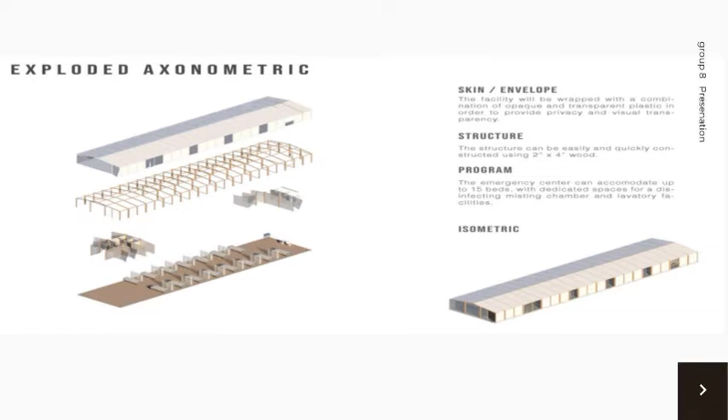Since our resources are limited and logistics at that time were difficult under enhanced community quarantine, the facility needed was one that did not require a lot of manpower and construction equipment. The EQFs are meant to use materials that are readily available and understood by anyone, such that any worker can work with it, not just throughout the city, but nationwide.

As you can see in the picture of the floor plan and the structure of this design, each facility measures 6 by 26 meters and will have 15 beds and 2 toilets. Patients and healthcare workers have different entrances, with doctors having their own external testing box to check patients without having to go inside the facility.

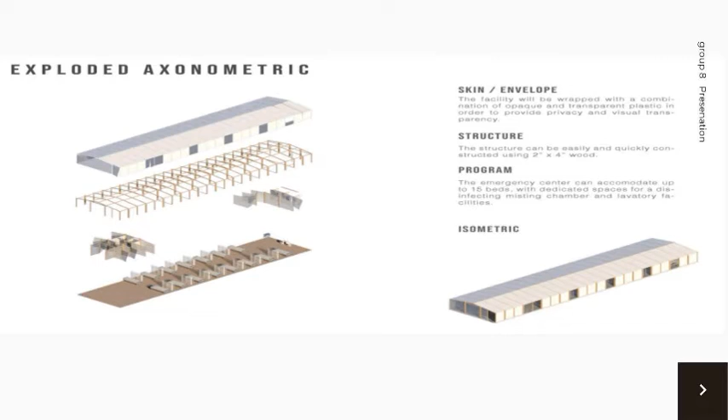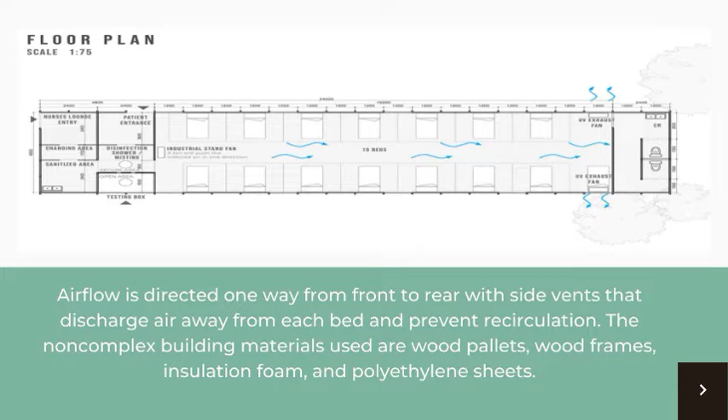Based on investigation by the World Health Organization, transmission of the virus happens due to sneezing and coughing, so we are asked to wear masks. Since the spread is airborne, the architect must consider how the air circulation will work inside the facility. Airflow is directed one way from front to rear, with side vents that discharge air away from each bed and prevent recirculation.

The non-complex building materials used are wood pallets, wood frames, insulation foam, and polyethylene sheets.

In addition, the designs have been posted online and made open source so that anyone can use them. The company hopes that more organizations will adopt the designs and use them as they see fit to build more facilities more quickly. As of April 15, 2020, the WTA Architecture plus Design Studio, along with many collaborators, completed 17 EQFs to reach their goal production of 62 units, providing approximately 1,000 beds.

Along with that, Filipino architects in the DOH, RITM, and LCP are already applying architectural, medical, and engineering solutions.

The second proposed design is made by Architect Rico and Architect Florendo. Architectural solutions were formulated for the designs such as cargo containers and repurposed government-owned structures like unused buildings, gymnasiums, sports centers, convention centers, covered courts, and even classrooms in public schools are to be used. Each has its own advantages and disadvantages, depending on the different parameters and requirements.

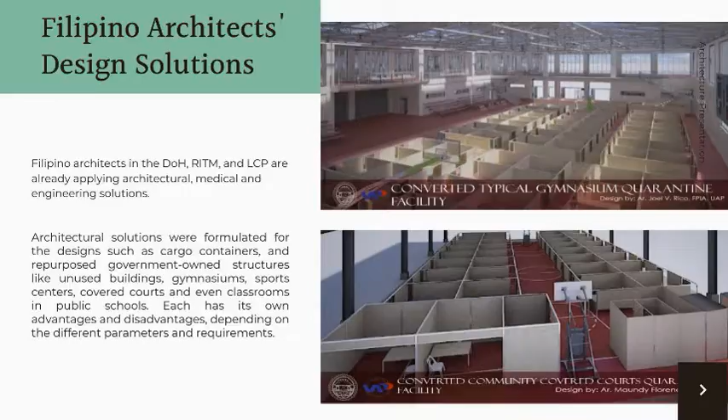The second one is, according to the design of architect Florendo, he used the concept of modular coordination system considering commercial dimensions of major materials. Design volume management is applied in order to minimize costs and wastage. Panels are easily sourced materials with lightweight metal frames. Components are collapsible and easy to transport. Lastly, panels are to be applied with self-cleaning and germ-retardant paint.

Some of these facilities may not fully address the requirements but could be considered as a temporary solution at the time. These were conceptualized to augment the needs for such facilities as the fastest and easiest solutions, as these quarantine facilities may help existing hospitals protect its more vulnerable patients and health personnel against the risk of contracting the disease. The pandemic has called us to refocus our interests from being a solitary designer to multi-professional and multi-scale design collaborators in order to address a worldwide health problem in pursuit of medical and design solutions.

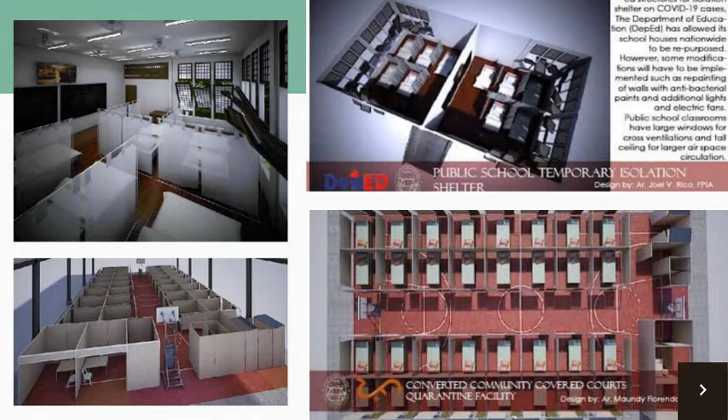Next is how the architect prepared the individual from COVID-19.

By conducting research about COVID and its causes, architects can be prepared and help individuals, as spaces can be intentionally designed to help prevent, contain, and treat infectious disease including COVID-19.

Some have put up tents to help the homeless during the COVID-19 crisis. Heated tents with bathrooms and showers have space for 40 beds for infected homeless people to get the care they need away from the shelter community.

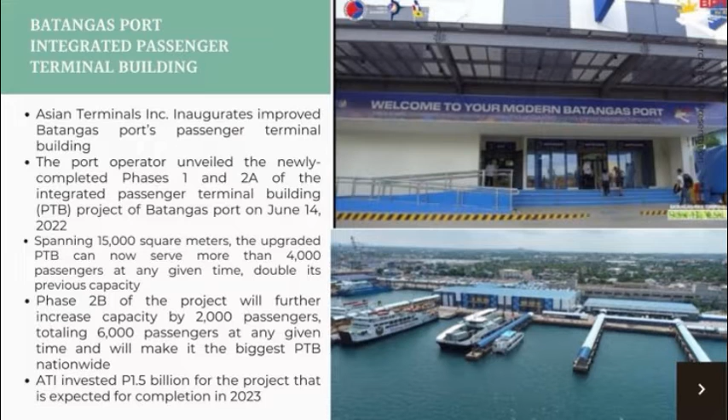If passengers need assistance, there's an information help desk with customer service staff ready to assist 24/7. Next is the facilities of the passenger terminal building. It is fully air-conditioned and has PWD-friendly facilities to offer a more convenient and comfortable travel experience for passengers.

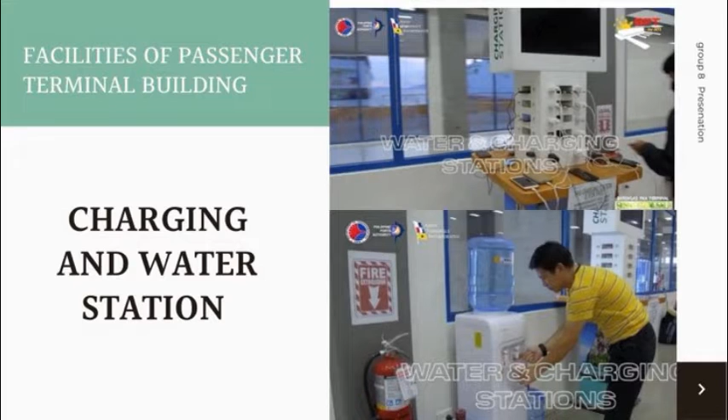First is the waiting area lounges or VIP lounge. Next is the charging station and the water station. Next is the nursing room for breastfeeding moms and a multi-faith prayer room available for all religions. Next, the ticketing system is like a modern airport amenity. Lastly, the pasalubong center.

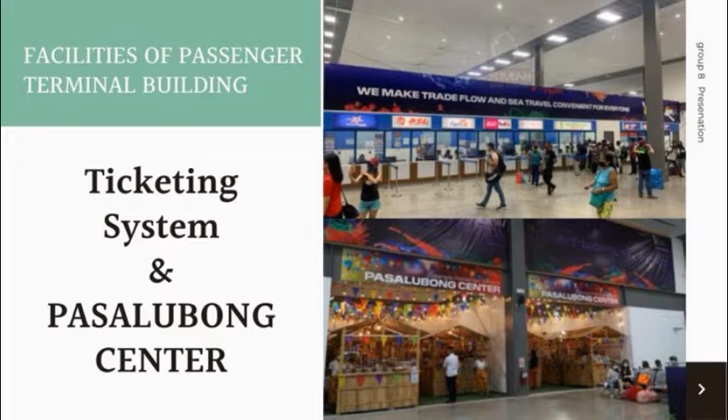In the passenger terminal building, there is a protocol and guidelines. First, terminal personnel shall wear masks and gloves at all times. Second, commuters shall undergo body temperature checking prior to entering the terminal. Next, commuters shall wear masks and observe social distancing. And lastly, ticket sellers shall be separated in a booth to limit physical interaction with commuters.

The upgraded port is now capable of delivering a more efficient, seamless, safer, and convenient maritime travel to our local and foreign visitors.

The PTB or Passenger Terminal Building further provides livelihood to Batangueños as more job opportunities will be opened and expected to usher economic and tourism growth in Calabarzon.

The next structure is SM City Roxas, a super mall of SM Prime Holdings Incorporated, which officially opened its doors on April 8, 2022, bringing many firsts in the city in shopping, leisure, and entertainment amid the relaxed COVID-19 restrictions. It is located at Arnaldo Boulevard in Barangay Baybay, Roxas City, Capiz.

SM City Roxas offers 2 levels of shopping, dining, and entertainment experience with almost 1,000 parking slots and a transport hub. It spans almost 41 thousand square meters of gross floor area, or GFA. SM City Roxas also offers an atrium that features a large open-air, skylighted space design, incorporating distinctive modern texture and fascinating colors.

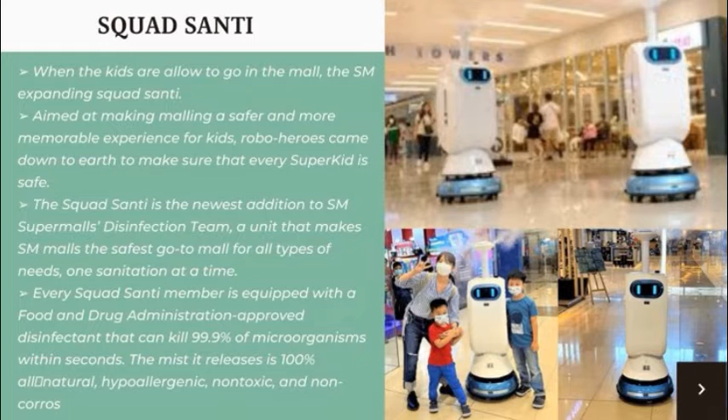It's armed with HD cameras for face recognition, a touchscreen, and a microphone to greet the kids, adding more fun to their malling experience. Lastly, every Squad Santi member is equipped with a Food and Drug Administration approved disinfectant that can kill 99.9% of microorganisms within seconds. The mist it releases is 100% all natural, hypoallergenic, non-toxic, and non-corrosive.

The next structures built during COVID-19 are Huoshenshan and Leishenshan Hospitals, located in Wuhan, China. As we all know, Wuhan is the epicenter of COVID-19, and these hospitals were built in just 12 days. Here's a video about Huoshenshan and Leishenshan Hospital.

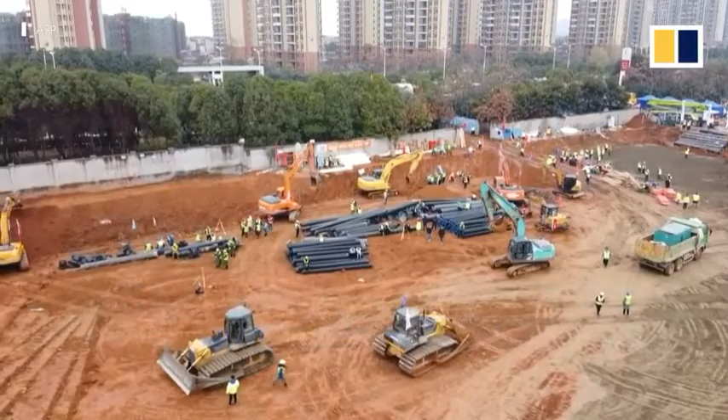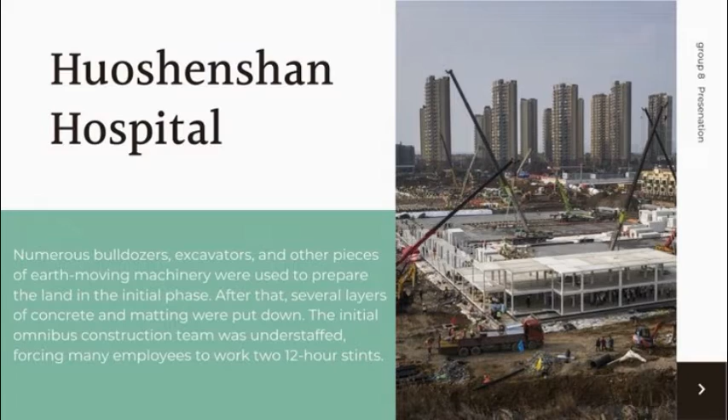Huoshenshan Hospital: numerous bulldozers, excavators, and other pieces of earth-moving machinery were used to prepare the land in the initial phase. After that, several layers of concrete and matting were put down. The initial construction team was understaffed, forcing many employees to work two 12-hour stints. Fabricated components were used in the hospital construction to speed up the installation process. In order to keep the units off the ground, they were placed atop pillars. Each room has 2 beds and is roughly 10 square meters. In order to keep airborne bacteria from leaving the hospital, each room is negatively pressured.

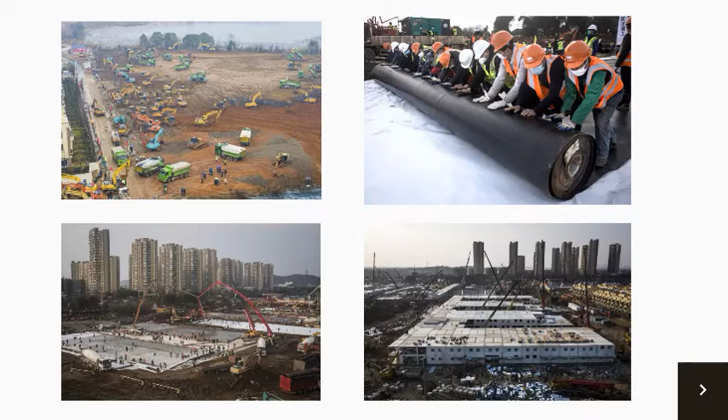This is the nursing unit module of Leishenshan Hospital. All modules are fabricated in the factory, transported to the road around the site, assembled outside the area, and hoisted into place. Small pipelines inside the ward module are reserved and embedded simultaneously. Some unique function rooms, such as pharmacies, use boxes as the basic unit, forming a spacious usable space through different horizontal and vertical directions.

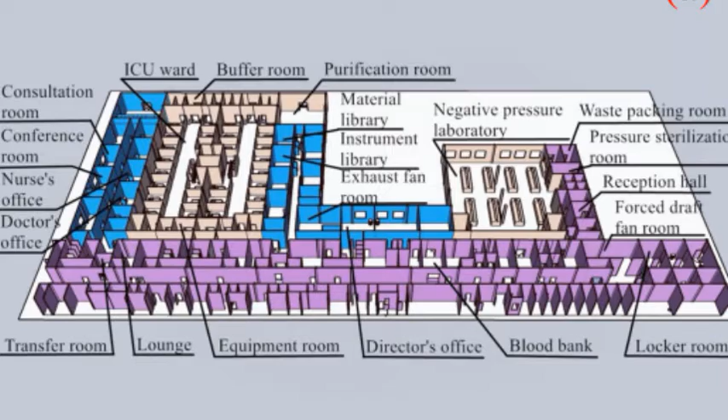Now, for the last topic of our group, I will be discussing some implications on the design of future residential architecture in the post-COVID environment. Implication means a conclusion that can be inferred from the study findings, either theoretical or practical.

According to the research paper released by the Journal of Green Building, new residential buildings in the post-COVID environment must embrace the principles of universal design and incorporate the lessons from COVID-19. Thus, the residence needs to be fully functional under normal usage with an added ability to function in a pandemic environment.

Based on this, they form a conceptual framing to visualize the operational spaces and design principles for this post-COVID residential environment, in order to lessen or minimize the likelihood of transmission through structural, physical, and practical means. The image below shows the four spaces needed.

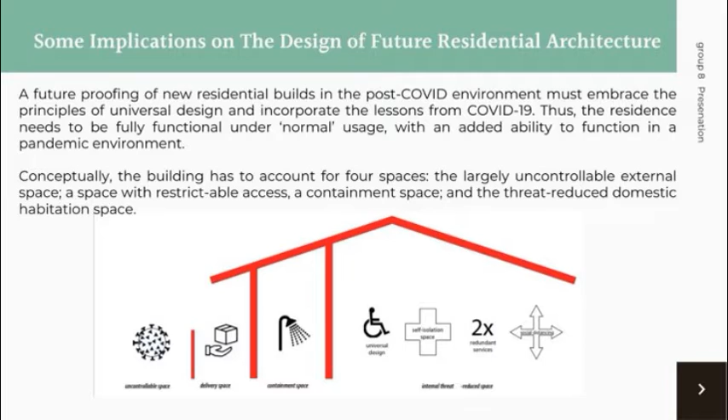First is the largely uncontrollable external space. Second, a space with restrictable access, or the delivery space, that restricts contact with another person. Third, a containment space designed to reduce accidental introduction of a virus load into the home. Fourth is the threat-reduced domestic habitation space, whose functions will be discussed more later on.

Next, I will be discussing the implications for new construction. First is the containment space. This space is needed to establish a boundary between the uncontrollable external world, where possible transmission takes place, and the internal personal universe, which is the inside of your home.

This space allows the occupants of the house to shed and store external clothing, footwear, as well as external shopping bags. This responds to what we practiced before the pandemic, because we usually carried clothing and sometimes even footwear indoors, which could bring germs or bacteria from outside. Now it is essential to have a space where we can shed and store these kinds of things.

Second, it gives us an opportunity to transfer any acquisitions or shopping from external shopping bags to receptacles restricted to internal use. Just like the first one, this is to limit virus transmission that could sit on the shopping bags and also to disinfect it.

Lastly, the containment space must contain a sink with running warm water. This allows the occupants to wash their hands upon arrival, and again prior to entering the internal space, after shoes and external clothing are removed and stored.

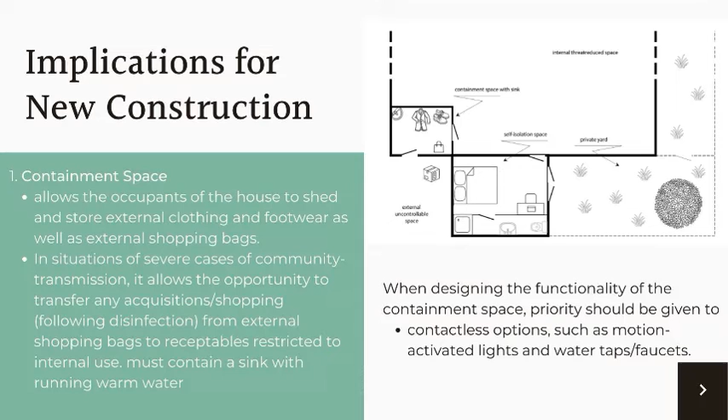The second implication is the threat-reduced internal residential space. Due to human socialization, any post-pandemic home design needs to take this into consideration through functionally differentiating and compartmentalizing, or dividing into sections, the internal spaces.

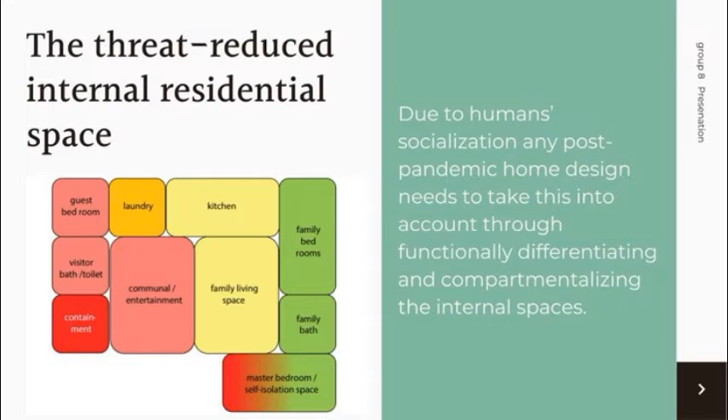Because humans interact with each other at various levels of intimacy, frequently mixing formal, work, and private spheres, this could lead to potentially exposing occupants to viruses or bacteria unintentionally introduced or brought by visitors. As you can see from the diagram, the spaces are well divided between guests and occupants in order to limit transmission towards the private or sleeping space of the residents, because the virus could survive for prolonged periods on various surfaces.

The third implication for new construction is the space suitable for self-isolation. First, residents will require a bedroom with an ensuite, meaning a bedroom connected to a bathroom, or a bathroom directly connected to the bedroom. This allows one or two people to safely self-isolate without putting other occupants at undue risk by using a shared bathroom. Second, the room needs to be large enough that a temporary workstation can be added.

As the isolated person could be a student or worker, this would allow the occupant to carry out work functions to the extent that their health permits. Third, from a technical perspective, the bedroom will require an extra individual filter system, while the humidity exhaust of the ensuite has to be vented externally rather than into the roof cavity.

Air movement from the bedroom into the remainder of the internal residential space needs to be prevented or at least minimized, since the virus could transmit this way. To allow the isolating occupants safe access to the outside environment, the bedroom should open to an external but self-containable courtyard or open space.

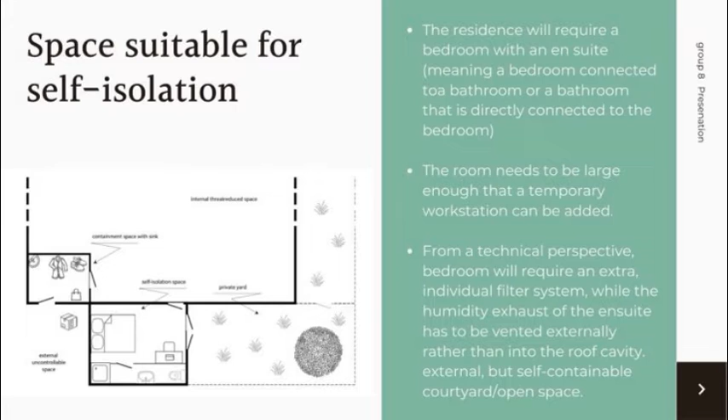Based on the floor plan, the bedroom has a door connecting to the courtyard space. It may be an open space but also contained, due to the fence dividing it from the other space of the courtyard that could be accessed by other occupants without having to interact with them.

The fourth one is the communal spaces accessible to visitors. For visitors, it is suggested to have a larger room space that allows guests to spread out but that are also contained, so the sleeping section of the residence can be shielded by using doors from aerosols or fine particles emitted by the guests.

Second, the design of interior spaces needs to consider sound dampening, since aerosol emissions or transmission of fine particles during speech tend to increase with voice loudness. Third, the communal dining or guest spaces need to be separately zoned with individual filter systems. Similar to what was discussed earlier, the condition for centrally ducted air conditioning servicing the master bedroom or self-isolation space also extends to the communal dining or guest space, guest bedroom, as well as the guest toilet or bathroom.

Lastly, the internal layout of the built environment and the associated movement patterns influence the proximity with which people pass each other, and thus enter another person's aerosol cone. For example, the width of the corridors and the positioning of doors should be planned well in order to avoid people passing each other too close. Particular consideration should be given to the flow of visitors admitted to the residence.

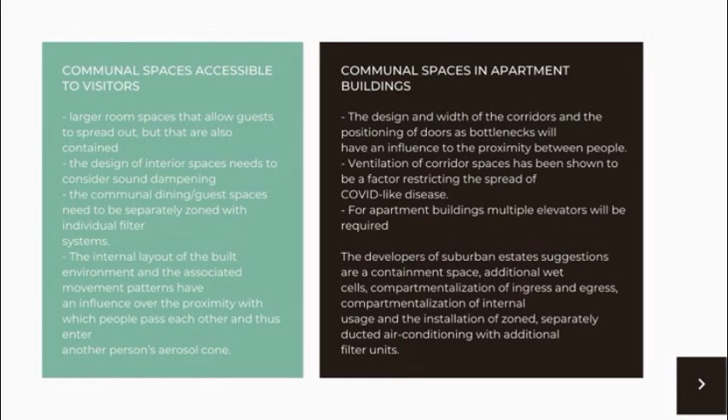In conclusion, the design advocated here will not prevent owners from being infected, but will reduce probabilities and will allow infected residents to engage in self-isolation and receive home care while minimizing transmission risk to other occupants and co-residents.